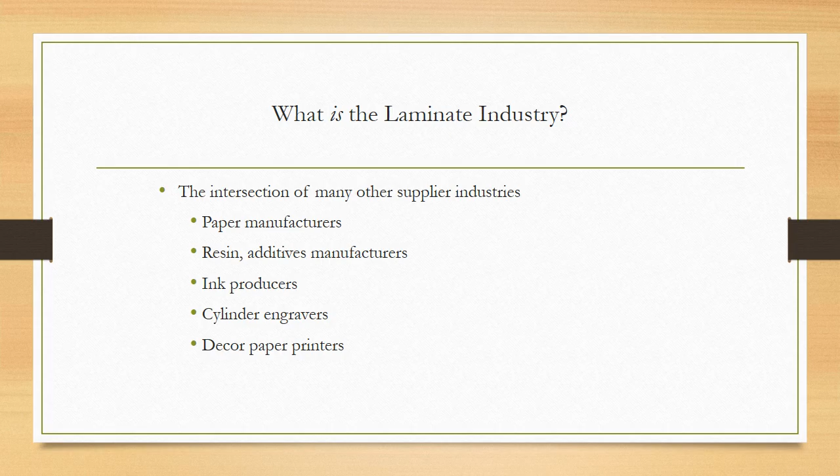So we are talking about the laminates industry, so it helps to maybe start with exactly what it is. There is no such thing really as a laminates industry. It is really the intersection of so many other industries whose products and processes go into creating what we know as decorative laminates. Paper manufacturers, resins and additives, ink producers, printing cylinder engravers, the people who actually do the printing, the decor paper printers, saturators, those are the people who make sure that the paper is treated so that it can be converted into a laminate.

Press plate and release paper manufacturers, this is where your textures come from. Equipment manufacturers, of course, laminators, the people who bring it all together. Composite panel producers, those are the guys who are creating the substrates that all these materials adhere to. Materials distributors, and of course designers. And what I am trying to do is bring designers closer into that full loop. So we, as an industry, are not just trying to create something from scratch and introduce it to the design world. We want to start with the thinking of designers and execute exactly what it is they're looking for.

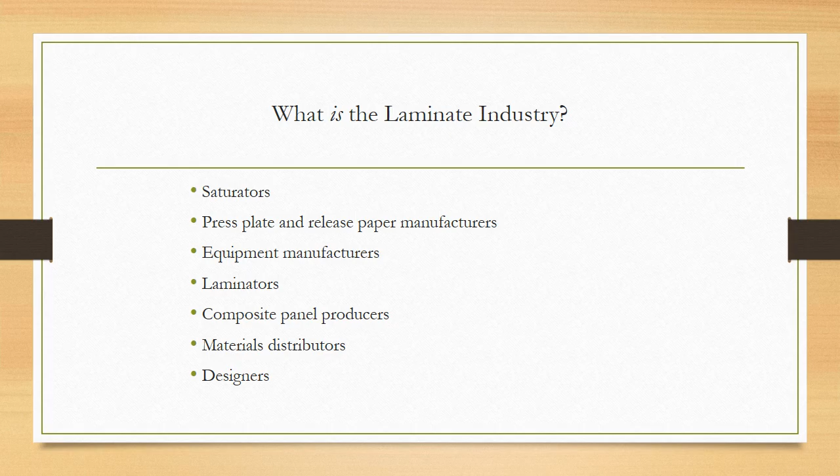So composite wood-based panels have to start with wood. Wood is actually nature's perfect building material. It is so integral to human evolution. I like to say that, if it weren't for wood, we wouldn't be here. Shelter, fire, heat, everything up through musical instruments. So much of what makes us human has only been made possible by our knowledge of how to work with wood. It is really the only living building material.

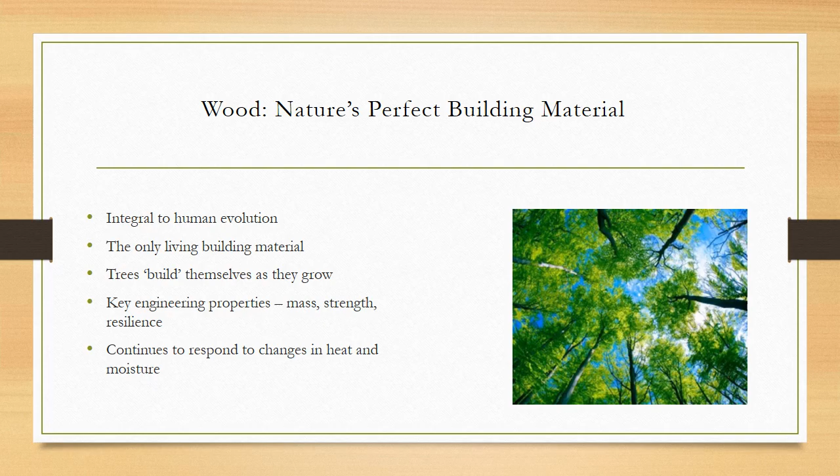If you think about it, trees build themselves as they grow, and in doing so, they engineer in all these properties that are so important for structures and for furniture: mass, strength, resilience. Really, nothing has quite that combination in a lightweight building material as wood. And wood, even after harvested and installed, still continues to respond to changes in heat and moisture. So, in a way, it's a living material even after it's been harvested and converted into building materials. Wood is also an infinitely resilient and renewable resource.

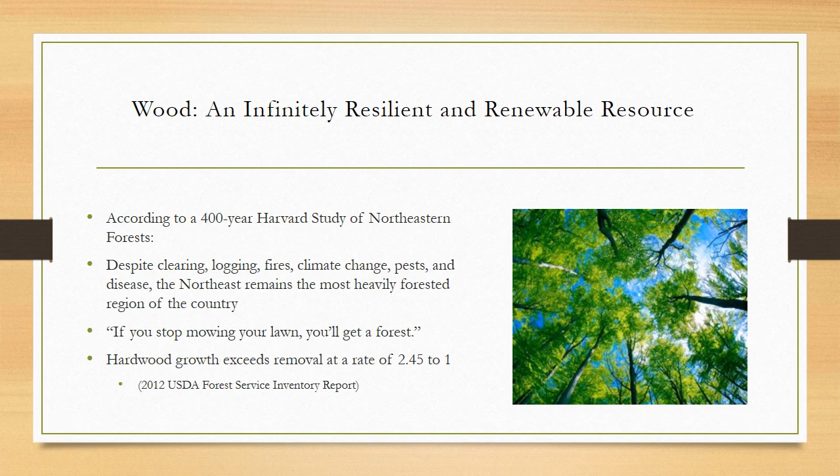According to a study by Harvard, over 400 years of northeastern forests, despite the clearing, the logging, fires, climate change, pests, disease, and human interaction, civilization, the Northeast remains the most heavily forested region of the country. And this is also true in the Midwest, where I live. If you stop mowing your lawn, you will eventually get a forest. Hardwood growth rates in North America exceed the removal rate by 2.45 to 1. So for every one tree we're taking out, we are planting or we are encouraging the growth of 2.45 more trees. So literally we have more trees in our forests than we did 50 years ago, 100 years ago.

Wood sequesters carbon. 50% of wood's chemical structure is actually carbon that it absorbs as it grows. And this is not released back into the atmosphere until it burns or decomposes. A tree can absorb up to 48 pounds of carbon dioxide per year and can sequester 1 ton of carbon dioxide by the time it reaches 40 years old. Once that tree is fully mature, however, the carbon intake does slow and nearly halts. Younger trees are more effective carbon absorption machines and oxygen producing machines than older trees. So younger forests are actually healthier for our environment.

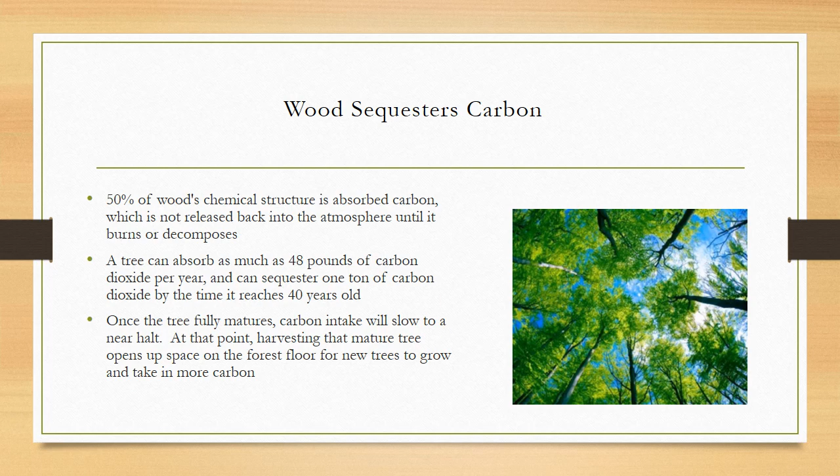The composite wood panel industry uses up to 99% of every tree harvested. The forests are carefully managed, FSC certified, and every possible waste product from the tree is utilized in one way or another. And this is not just to be green. These industries evolved by making the most out of the natural resources and caring for their resources.

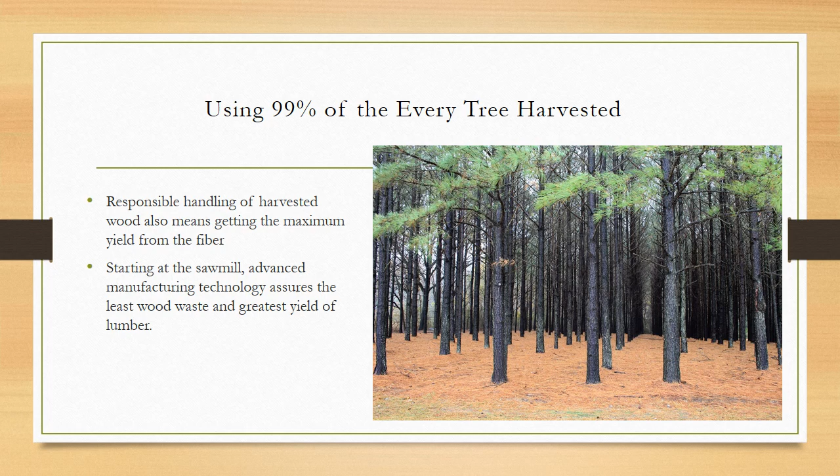Basically, all the byproducts from trees have some sort of use. Tree bark can be processed into mulch and soil conditioners. Sawdust can be used to operate kilns for drying wood, also sold off for animal bedding. Trimmings are chipped and processed into paper and other products.

And all of this saves millions and millions of tons of wood from landfills every year. And this is all fiber that would otherwise be burned or buried. Now, the sequestered carbon we mentioned earlier, that is sequestered until the wood is incinerated or decomposes. At that point, the carbon is released back into the atmosphere.

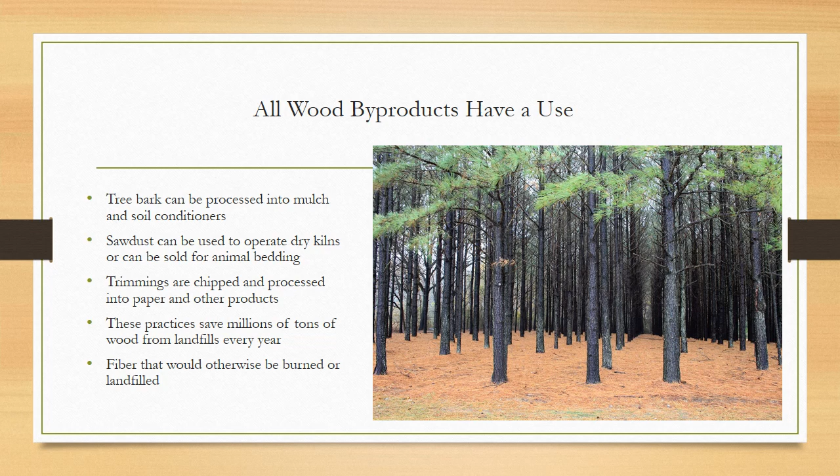So composite wood panels are really the ideal substrates for decorative surfaces. And this is because they are so carefully controlled for surface and dimensional stability. The smooth surface for decorative surfaces like veneers and laminates is very, very important for efficient processing and for the final look of the decorative panel, a smooth and consistent surface.

These panels can also be specially engineered for moisture resistance, fire retardancy, lighter weight, higher hardware holding strength, acoustic properties, etc. And they are also much more dimensionally stable than solid wood would be. And that's because the fibers in composite wood panels have been basically reoriented so there's no singular direction.

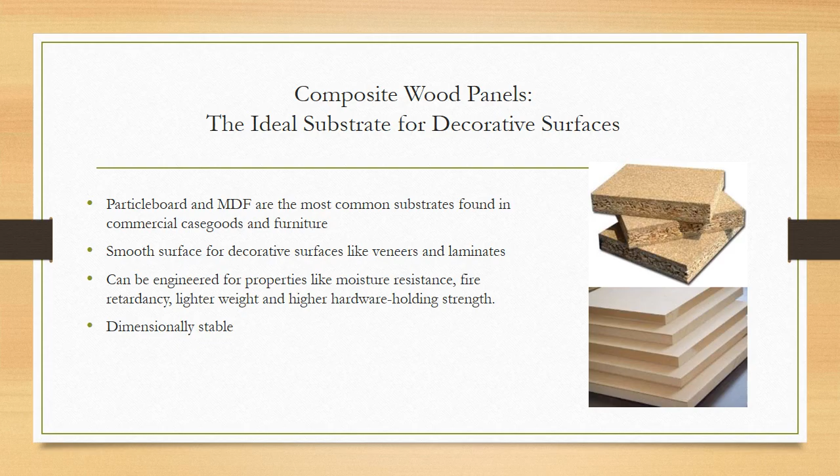In a solid piece of lumber, the fibers are all essentially heading the same direction, which means any changes in moisture and heat are just going to be amplified, and that's where you get your warping and cracking and splitting of solid wood. Composite wood panels will not warp, crack, or split, and they hold their dimensions very, very well.

So, re-emphasizing the point that the reoriented wood fibers are what gives composite panels like particle board and MDF their dimensional stability, and that dimensional stability is then what makes them the perfect substrate for any kind of decorative surface, whether it is a laminate or a veneer or a lacquer or a powder-coated finish.

The decorative surface goes on the top of the panel, and in many cases, whether it's a laminate or a veneer, a balancing sheet of laminate or veneer is used on the bottom of the panel to make sure that the panel stays flat. Because the surface is made from different material than the substrate itself, there can be some differences in how the surface responds to temperature and humidity changes.

And if you balance the panel with the same type of material, it doesn't need to be decorative, just needs to have the same properties, on the bottom or the back of the panel, it ensures additional stability.

All panels produced in North America meet CARB 2 standards, the California Air Resources Board version 2 standards, which cover indoor air quality and the amount of emissions that products can have. Every panel produced in North America meets or exceeds those standards.

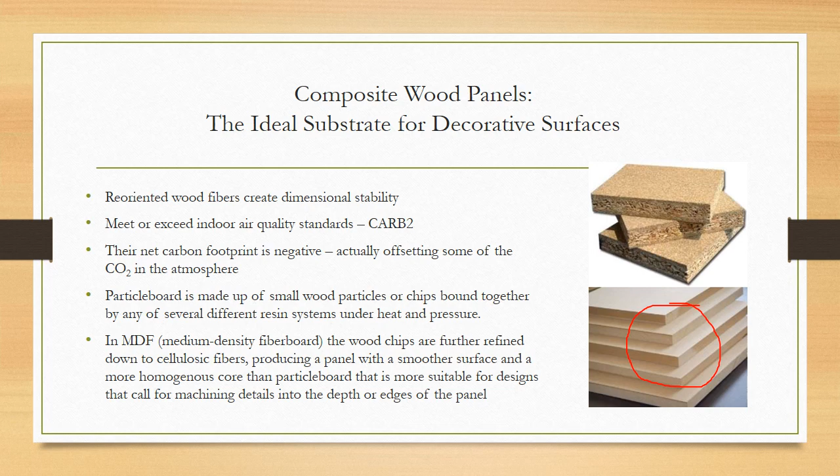That life cycle impact analysis found that particle board contains over 90% recovered fiber, MDF contains over 80% recovered fiber, and both of these panels use fiber that's left over from other woodworking or lumber mill processes. So the offal from a lumber mill, the offal from plywood plants, and even fiber that's left over from the manufacturing process. And some plants are actually able to use post-consumer wood fiber. So these materials actually start life as a recycled product.

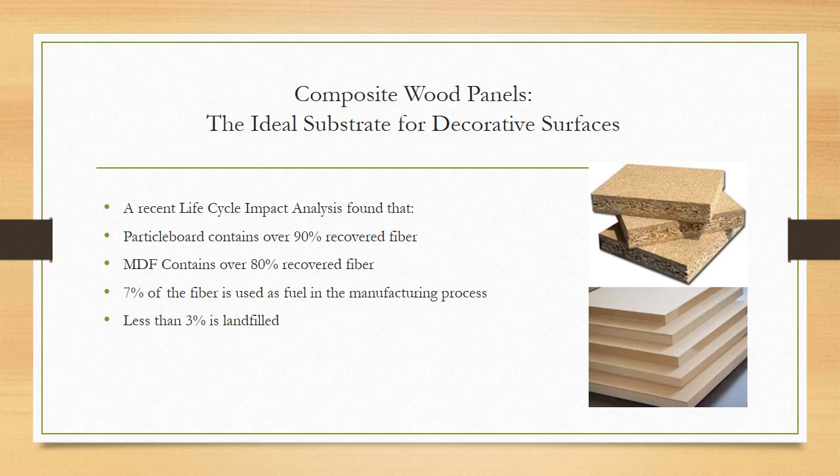7% of the fiber is used as fuel in the manufacturing process, and this means it is incinerated to heat the plant and to run the big presses that create these panels. Less than 3% is landfilled, and again, that number in most North American plants is much less than 3%. The industry itself manages to use about 99% of the harvested lumber fiber.

And we can't really talk about composite panels like particle board and MDF without mentioning the F word, formaldehyde. It's been in the news, and it is an essential building block of the adhesives, the resin systems that bind these panels together. It's also a naturally occurring element in wood. Trees will emit formaldehyde. As a matter of fact, every living thing emits some amount of formaldehyde. It's present in every cell in the body, and low levels are part of our everyday lives. There's a certain ambient level of formaldehyde that there's no way to escape, and it's been around forever, so there's no reason to be alarmed by the ambient levels of formaldehyde.

Formaldehyde is actually an essential building block of hundreds of products. Makeups, vaccines, pill coatings are made from formaldehyde resins. And like I mentioned, so many glues, the most effective glues and resin systems are produced with formaldehyde. It is one of the most studied compounds in history, and it does not accumulate in the body. Humans actually metabolize formaldehyde quite quickly.

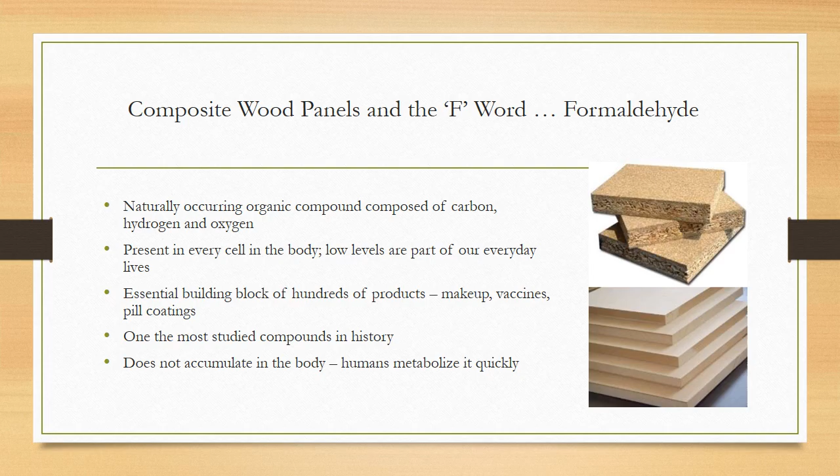No other compound offers the same sorts of benefits as formaldehyde-based resins. They do not break down under heat. They are resistant to fire and heat. They are pest resistant. They are manufactured safely. They have a high degree of stability once processed and manufactured, and they're very effective in binding wood fiber.

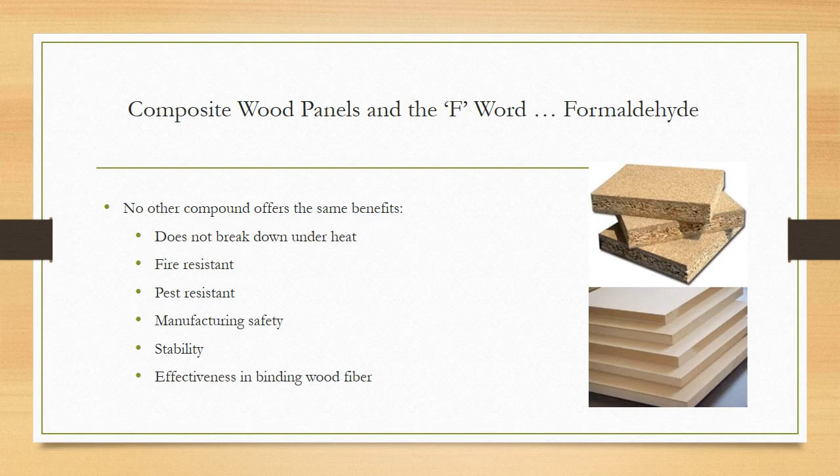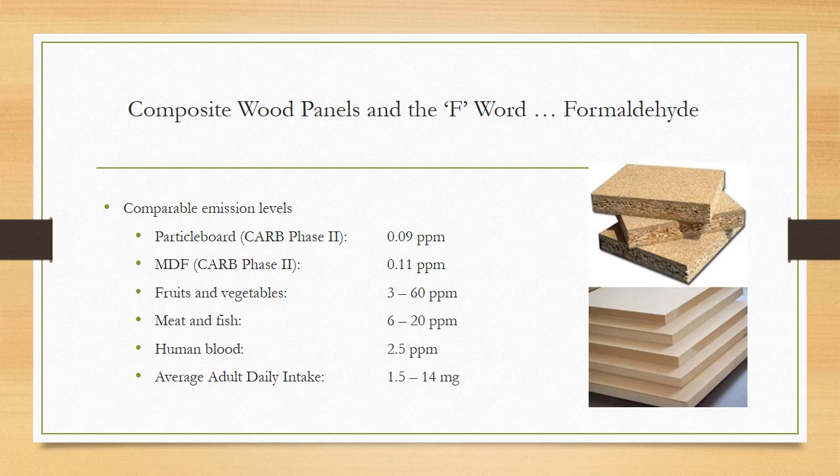The emission levels allowed by CARB Phase 2 from a particle board panel are 0.09 parts per million. In MDF, it's a little bit higher because there's actually more wood fiber in an MDF panel, 0.11 parts per million. To compare that to fruits and vegetables, which off-gas between 3 and 60 parts per million, meat and fish between 6 and 20 parts per million, human blood actually off-gases 2.5 parts per million formaldehyde. And the average daily adult intake of formaldehyde is between 1.5 and 14 milligrams, and that's mostly from food, but other ambient formaldehyde levels affect that. I do not know how to convert parts per million into milligrams.

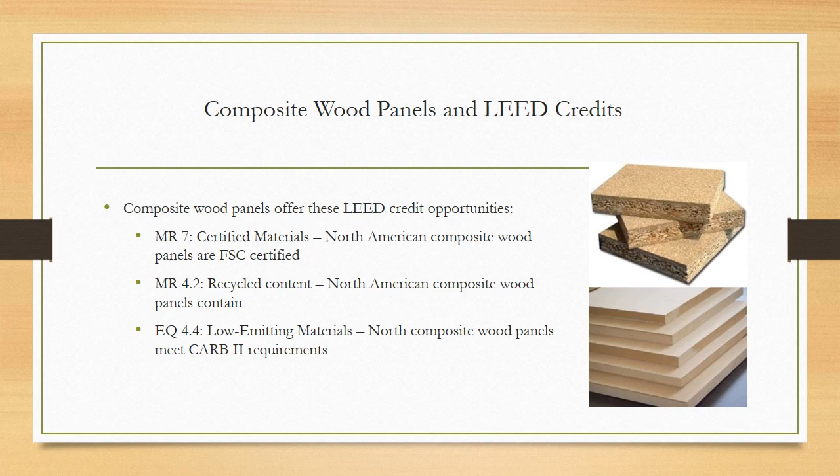LEED credits made available when using particle board and MDF as substrates with decorative surfaces. Now, these are the old LEED measurements, which people are still very comfortable with. MR7 certified materials: North American composite wood panels come from FSC certified forests, and the entire process is FSC certified. MR 4.2 recycled content: North American composite wood panels contain a high level of recycled material. And EQ 4.4 low emitting materials: again, these panels all meet or exceed the stringent CARB 2 emissions requirements.

In 2011, at the Milan Furniture Fair, the area they call Salone Satellite, which is where the young designers and students are invited to show off their ideas, there was a huge particle board sculpture made by the designer Lorenzo Damiani. His goal was to demonstrate the worth of worthless materials in alternative ways with the aim of protecting resources. A quote from him: "Using resources and materials responsibly, striving to give dignity to materials normally perceived as worthless."

Proposing alternative uses of existing materials. This is the challenge of today and above all tomorrow. Damiani says, "This is why I chose to use composite wood panels in a different way. In the future, the distinction between valuable and less valuable materials will disappear because they will all be valuable. So, why not get ready now?"

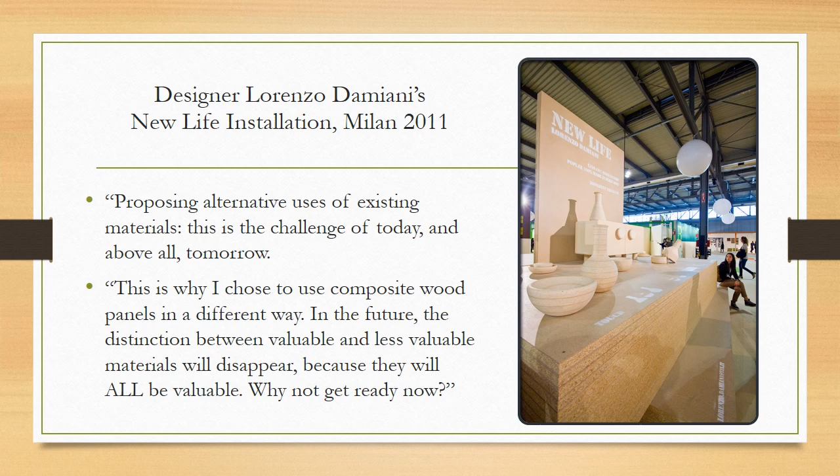Thanks for watching part 2. Stay tuned for part 3, where we're going to cover laminates and high pressure laminates.